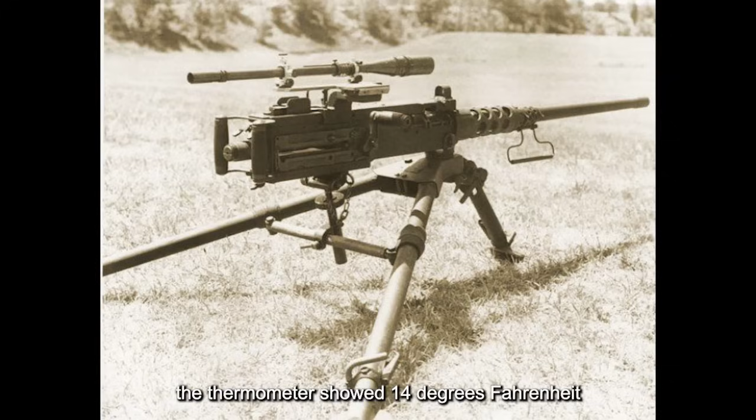January 23, 1943, Eglin Field Proving Ground, Florida. The thermometer showed 14 degrees Fahrenheit, extraordinarily frigid for the Florida Panhandle. Samuel Green observed a weapon experiencing its 17th catastrophic failure in just two hours. America's principal aircraft armament, the Browning M2 .50 caliber machine gun, lay inoperative and frozen on its testing platform. Vapor drifted upward from the barrel, a cruel reminder of how the weapon faltered in freezing temperatures.

Major Robert Johnson from the Army Air Force's Armament Laboratory slammed his clipboard down onto the icy sand, exasperated. "Green, this situation is untenable. Currently, 423 B-17s operate in England, each equipped with 13 of these weapons. That totals 5,499 guns that will cease functioning the instant they reach altitudes exceeding 20,000 feet. Our 8th Air Force achieves a 3:1 kill ratio against German aircraft when the weapons function properly. When they malfunction, our bombers become defenseless prey."

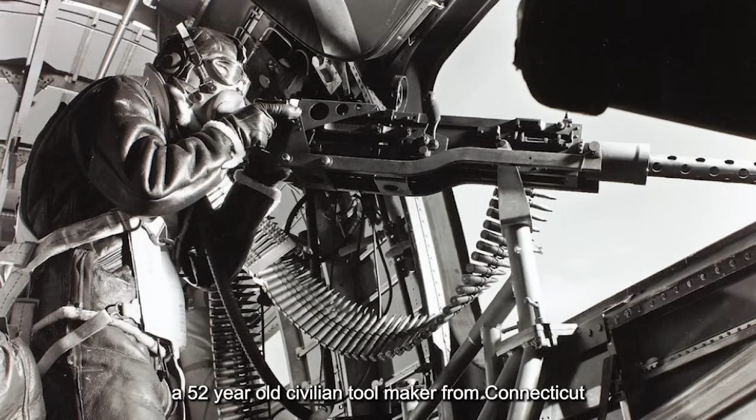Samuel Green, a 52-year-old civilian toolmaker from Connecticut without high school completion, military experience, or weapons design credentials, studied the jammed machine gun with a mixture of disappointment and intrigue. Army Ordnance specialists had pronounced the challenge insurmountable. Engineers from Browning Company had exhausted conventional approaches, yet the weapon remained frozen while American airmen perished over Germany with inoperable guns. Green retrieved a small notebook from his tool bag and documented a single observation that would transform automatic weapons engineering globally.

"The problem is not the gun. The problem is, we are trying to make the gun work like we think it should work, instead of letting the gun tell us how it wants to work."

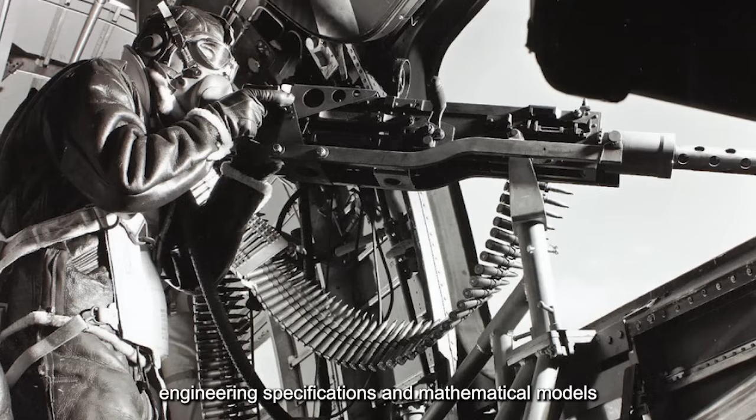Major Johnson regarded the civilian toolmaker, whose words seemed cryptic. "Green, your statement defies logic. The gun operates as an engineered mechanism governed by physical laws. We possess test data, engineering specifications, and mathematical models."

Green extracted a well-worn machinist's file from his bag. "Respectfully, Major, your mathematical models did not create this weapon. John Browning designed it through intuition. I am a toolmaker. I understand intuition. Grant me one week and authorization to alter this weapon in ways that will disturb your engineers, and I will ensure it never jams again, under any circumstances."

Neither man realized this moment would initiate the most contentious modification in United States military weapons history. Within three months, Green's unconventional solution would convert the .50 caliber Browning from an unreliable weapon into the most dependable machine gun ever manufactured. Within six months, his alterations would preserve thousands of American airmen's lives. The principles of automatic weapons design were about to be rewritten by a civilian toolmaker armed with a file and unwavering determination.

John Moses Browning's final masterpiece was the Browning M2 .50 caliber machine gun. Conceived in 1918, it had proliferated throughout American military operations. By 1942, every heavy bomber carried multiple .50s. Fighter planes employed them as principal weapons. Ground vehicles and naval vessels mounted them extensively. The United States military had adopted the .50 caliber as its standard heavy machine gun.

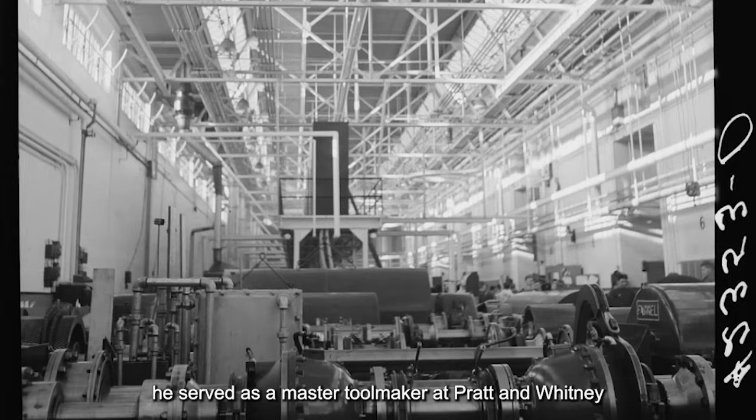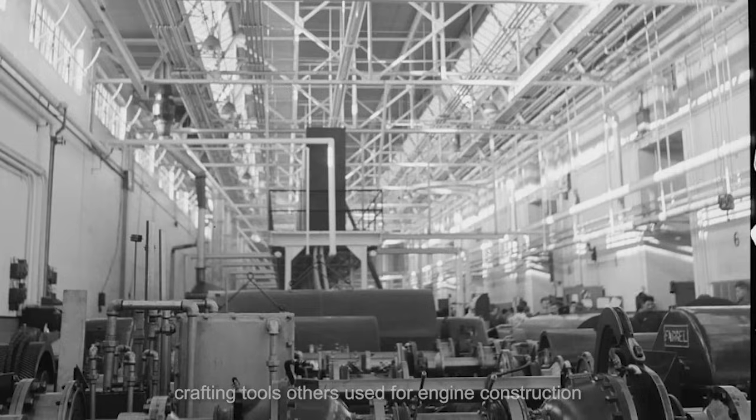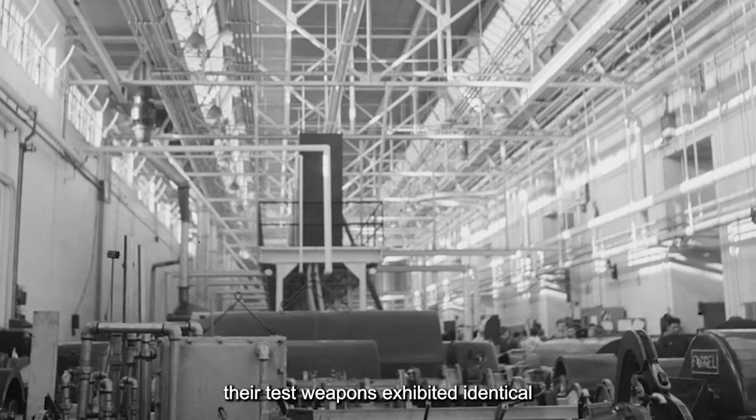Samuel Green stumbled into this crisis almost by chance. He served as a master toolmaker at Pratt & Whitney in Hartford, Connecticut, specializing in precision gauge fabrication. For 37 years, he worked six-day weeks crafting tools others used for engine construction. When Pratt & Whitney secured a contract to produce M2 machine guns, their test weapons exhibited identical cold weather jamming. The plant manager, desperate for answers, announced a $1,000 bonus for anyone solving the problem.

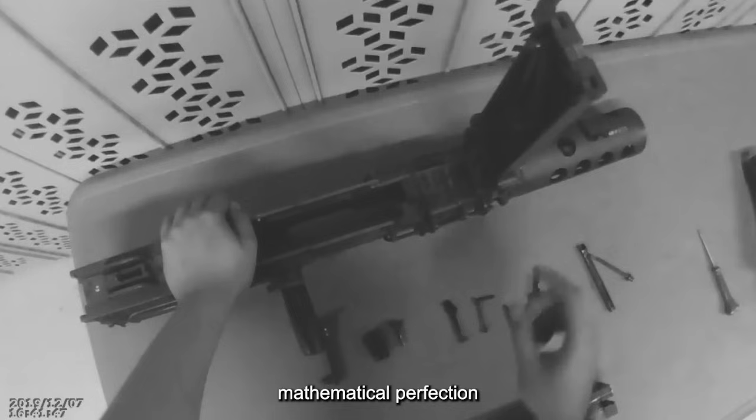He declared that every engineer examining this weapon confirmed the design was flawless. Therefore, the issue must originate externally. Browning's design could not be modified. It was already perfect. Green found this perspective disturbing. Throughout 37 years, he had discovered no design was perfect. Every mechanism possessed peculiarities revealed only through operation. Mathematical perfection and functional reliability were distinct concepts.

That evening, Green inspected a failed prototype weapon. He disassembled it entirely, measuring every component.

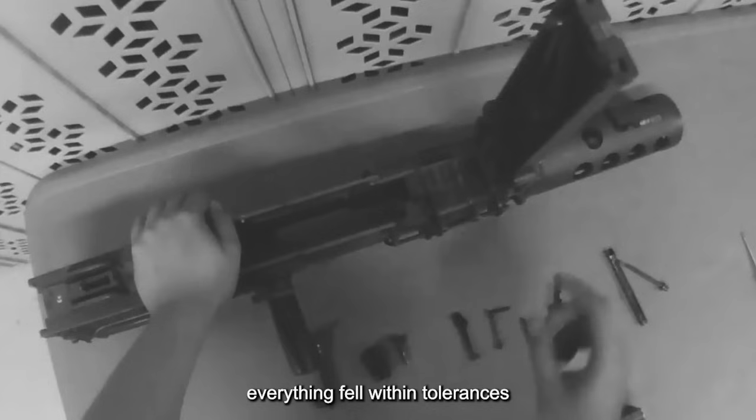Everything fell within tolerance. Everything matched specifications precisely. Yet the weapon had failed.

During slow reassembly, sensing how each part integrated, he detected something unusual. The bolt carrier fit extremely precisely within its channel. However, when Green manually pushed it, he perceived slight resistance at particular points.

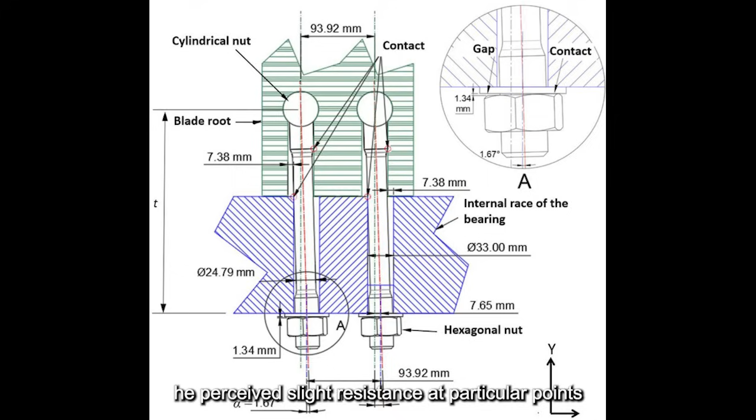He scrutinized the channel more thoroughly. The surfaces were impeccably machined, yet the channel exhibited a barely detectable bend, less than 20,000ths of an inch across 12 inches, well within acceptable tolerances. Green suspected this minuscule deviation created binding.

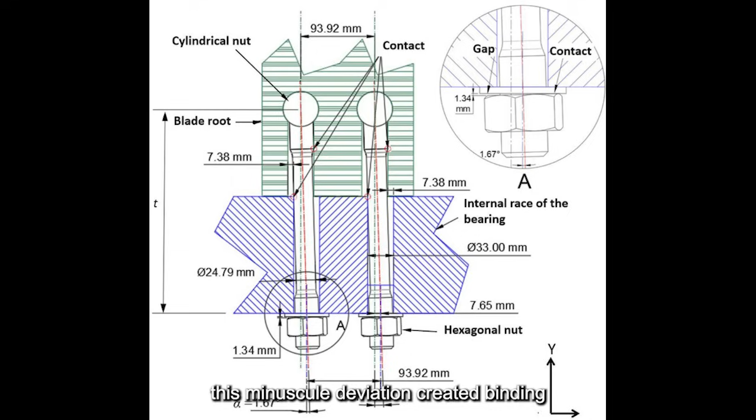In warm conditions, it proved insignificant. In cold conditions, with thickened lubricant, it was sufficient to trigger failure.

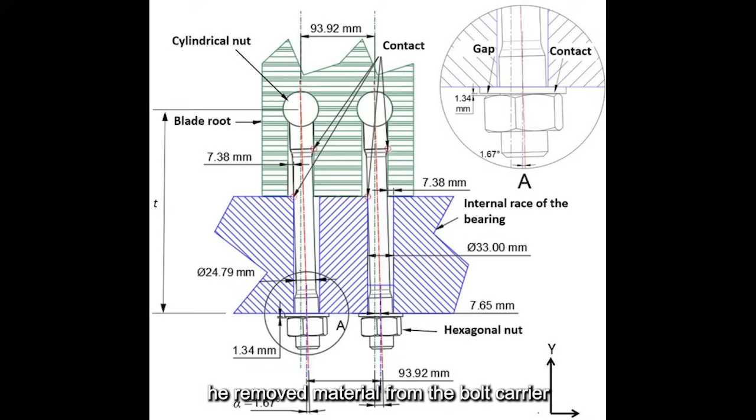That night in his basement workshop, Green initiated an experiment that would appall Army engineers. Using a precision file, he removed material from the bolt carrier, decreasing its width by 30,000ths of an inch. This expanded clearance beyond specified tolerances.

By engineering standards, he had damaged the weapon. By Green's assessment, he had provided the bolt carrier adequate room to cycle smoothly despite minor imperfections.

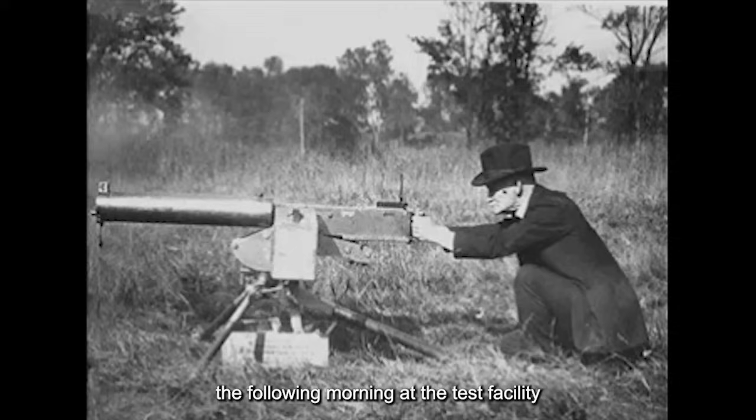The following morning at the test facility, the modified weapon underwent refrigeration at -30 Fahrenheit for 4 hours, then test firing. It operated flawlessly. 100 rounds, 200 rounds, 500 rounds, zero jams.

The range officer was astonished, then alarmed. "You altered a military weapon without authorization. You changed dimensions beyond specified tolerances."

Green replied calmly. "The specifications produce a weapon that jams. My modification produces a weapon that functions. Which matters more?" Within hours, Green confronted the plant manager and Army Ordnance Liaison Captain Robert Mitchell.

Captain Mitchell was incensed about unauthorized modifications potentially endangering service members, but the plant manager contended they should confirm whether the modification actually functions before rejecting it. Mitchell consented to forward the weapon to Eglin Field for thorough evaluation.

The weapon reached Eglin Field on January 18th. Major Johnson was dubious but desperate. On January 23rd, in 14-degree temperatures, he mounted Green's modified weapon for cold weather assessment.

The outcomes were remarkable: 2,000 rounds without a single malfunction. Subjected to -50 Fahrenheit for 12 hours in a cold chamber, it fired instantly with no jams. Intentionally contaminated with sand and dirt, it continued operating, demonstrating flawless function under conditions where standard weapons consistently failed.

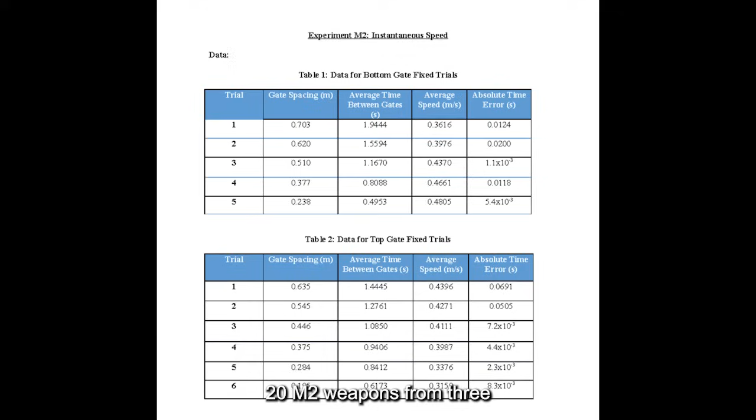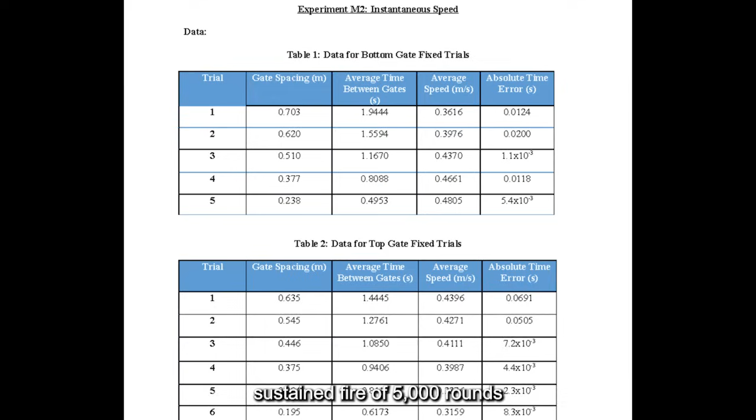Comprehensive testing commenced February 1st. 20 M2 weapons from 3 manufacturers received Green's personal modifications. Each underwent rigorous evaluation: standard firing, cold chamber testing at -50 Fahrenheit, sustained fire of 5,000 rounds, deliberate fouling, and high-altitude chamber testing simulating 30,000 feet.

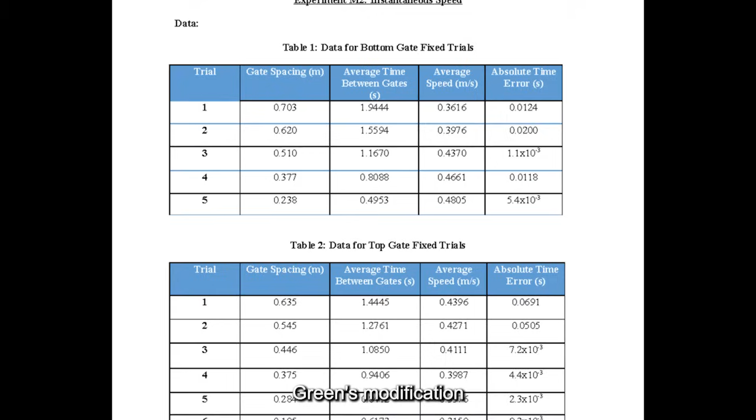Results proved consistent across all 20 weapons. Cold condition malfunction rate: 0.8%. Standard unmodified weapons: 68%. Green's modification reduced cold weather malfunctions by 99%.

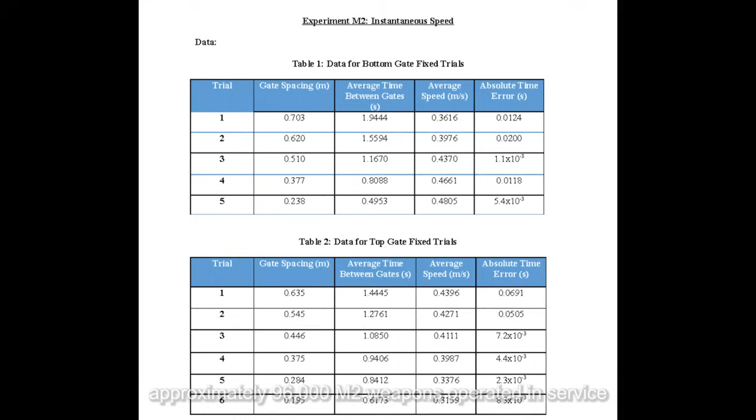Implementing this across military inventory presented enormous obstacles. By February 1943, approximately 96,000 M2 weapons operated in service, with another 60,000 in production. The Ordnance Department estimated 18 months and $12 million to modify all existing weapons.

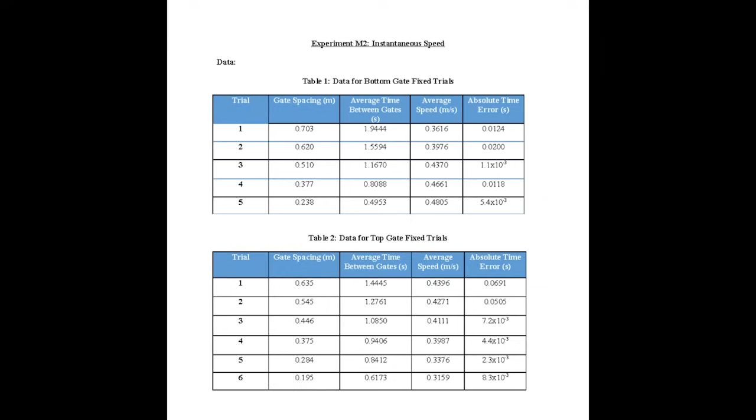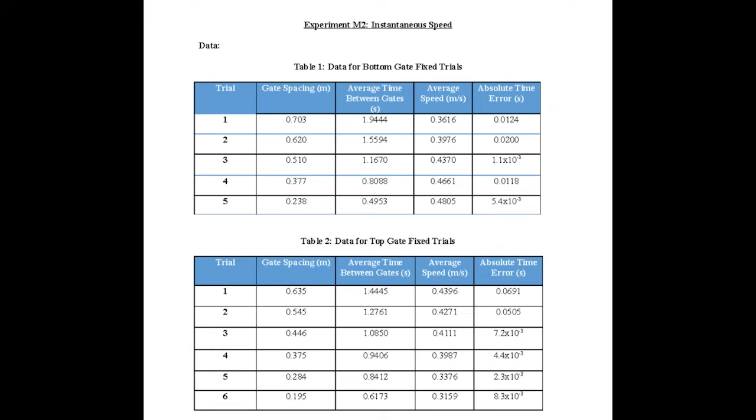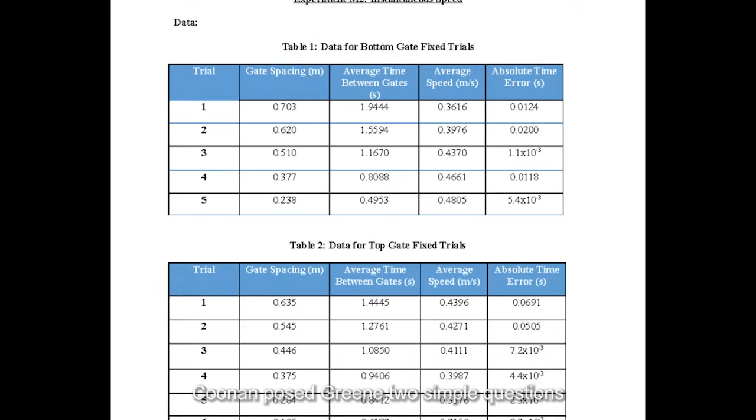Generals Lesley McNair and Henry Arnold both advocated immediate implementation, but the Ordnance Department demanded additional testing. The bureaucratic standoff resolved when Lieutenant General William Coonan, Director of War Production, personally visited Eglin Field. After observing modified weapons firing flawlessly, Coonan posed Green 2 simple questions.

"Can trained armorers perform this modification quickly on weapons already deployed? And can production lines integrate this without slowing production?" Green confirmed both.

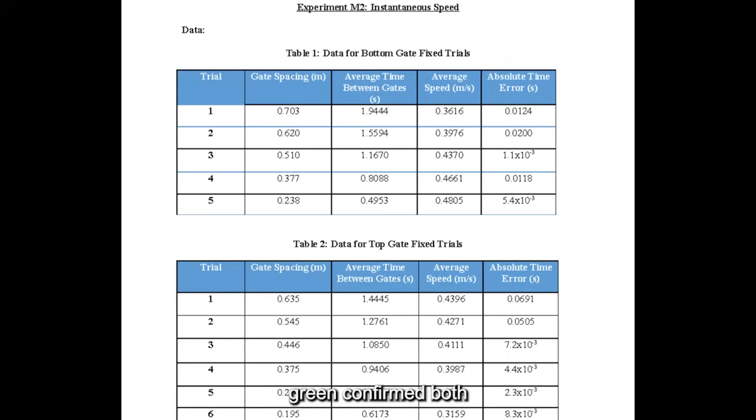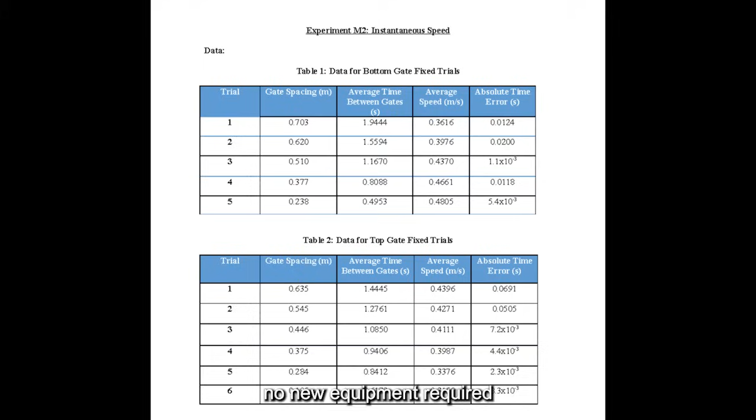Approximately 45 minutes per weapon. Production lines simply machined to different dimensions. No new equipment required. Coonan decided immediately for complete implementation across all services.

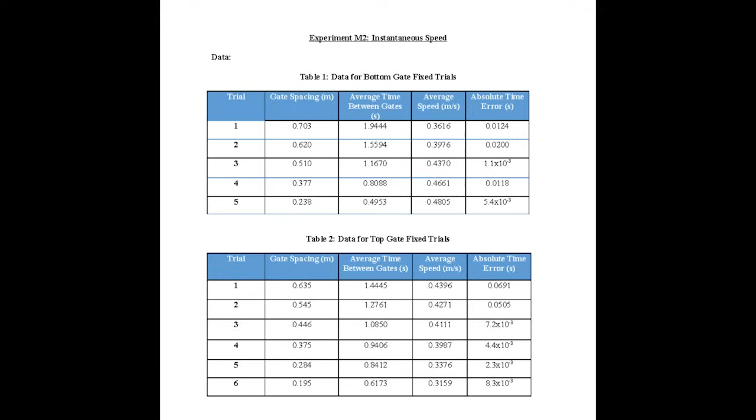All existing weapons would receive modification during routine maintenance. All production lines would implement new specifications immediately. The modification received designation Modification 743, but became known as Green's Fix.

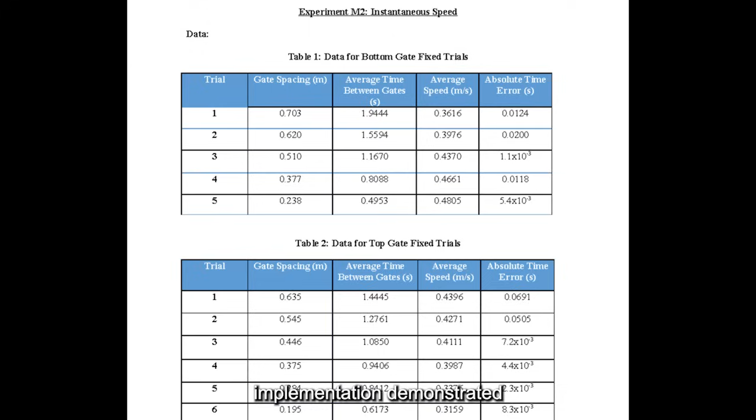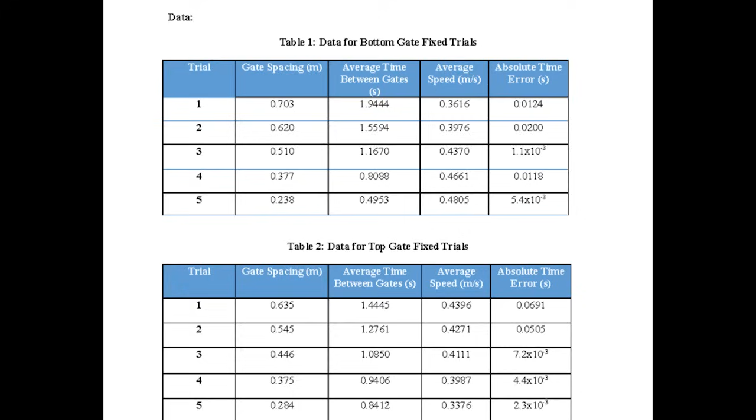Implementation demonstrated American industrial capacity at its zenith. Within 1 week, detailed instructions reached every armory. Within 2 weeks, production lines integrated new specifications. Within 1 month, mobile modification teams operated at air bases throughout the United States and England.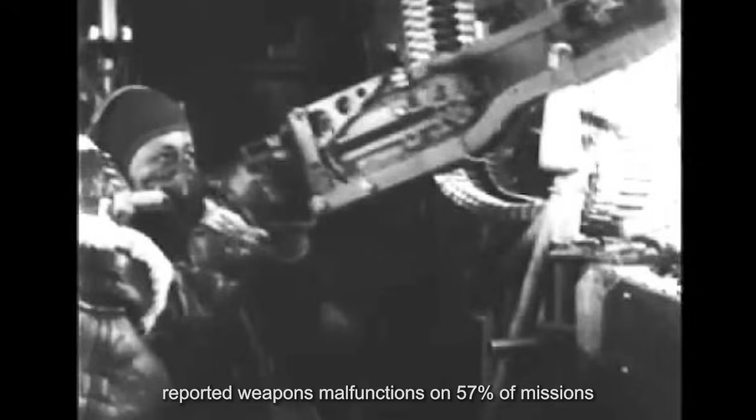Combat impact was immediate. March 1943, pre-modification, 8th Air Force bombers reported weapons malfunctions on 57% of missions. April, with 30% modified, malfunction rates dropped to 38%. By June, with nearly complete modification, malfunction rates stabilized under 4%. Green's modification reduced weapons failures by 94%.

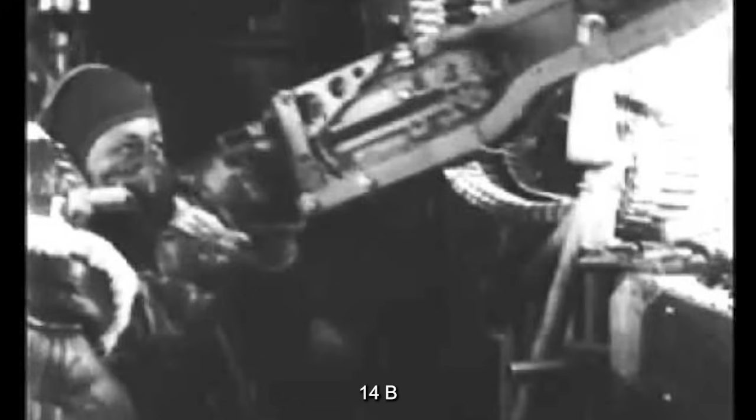More significantly, bomber losses attributable to disabled armament plummeted. First quarter, 1943, 14 B-17s confirmed lost after total weapons failure. Second quarter, post-modification, only 2 lost. The modification directly preserved bomber crews.

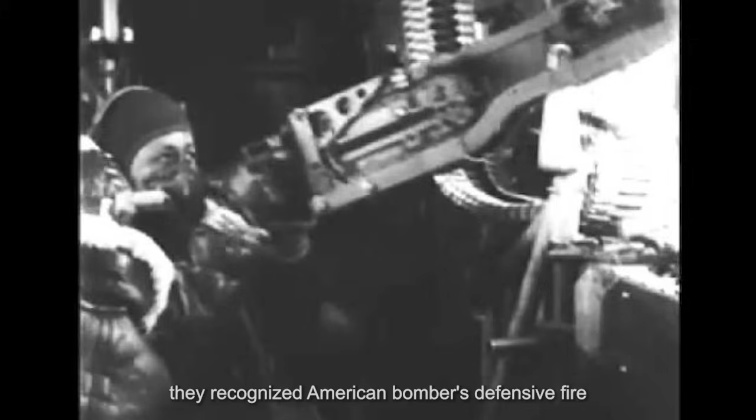German Luftwaffe pilots observed the transformation. Intelligence reports from captured pilots revealed they recognized American bombers' defensive fire had grown more dependable. One June report noted American gunners maintained consistent fire throughout engagements. The previous pattern of weapons failures had vanished. Attacking American bombers became considerably more hazardous.

Ground forces experienced comparable improvements. Tank commanders reported vehicle-mounted 50s operated reliably. Infantry heavy weapons platoons discovered their 50s demanded less maintenance. The Pacific Theater witnessed improvements in high humidity and saltwater environments. Navy vessels reported fewer jams during anti-aircraft engagements, critical against kamikaze attacks.

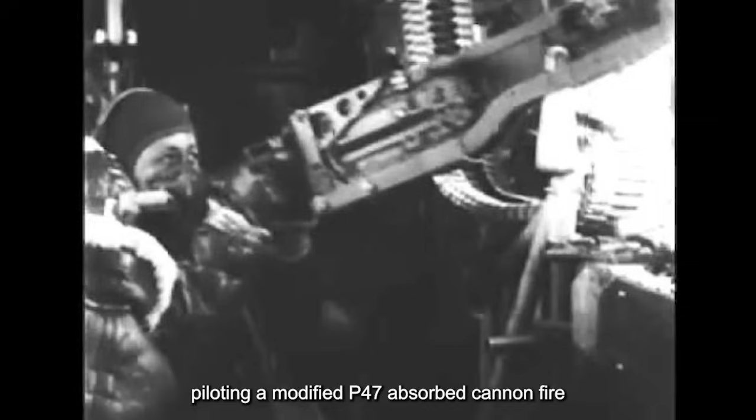One particularly striking example occurred November 2, 1943. Captain Robert Johnson of the 56th Fighter Group, piloting a modified P-47, absorbed cannon fire. His aircraft sustained 21 cannon strikes and over 100 machine gun impacts. His guns continued firing throughout.

Army engineers later determined that without Green's modification ensuring weapon reliability, Johnson probably would have perished. Instead, he survived to become one of America's leading aces with 27 victories.

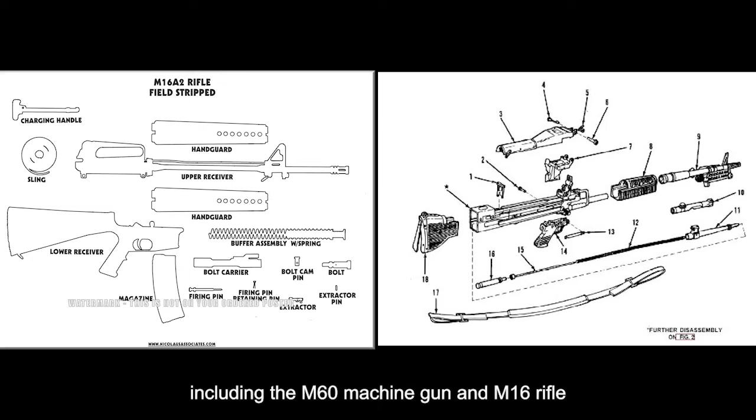The technical legacy transcended the M2. The principle of operational tolerance influenced all subsequent automatic weapons design. Post-war weapons, including the M60 machine gun and M16 rifle, incorporated clearances optimized for reliability rather than theoretical perfection. Green's insight became foundational to American weapons development.

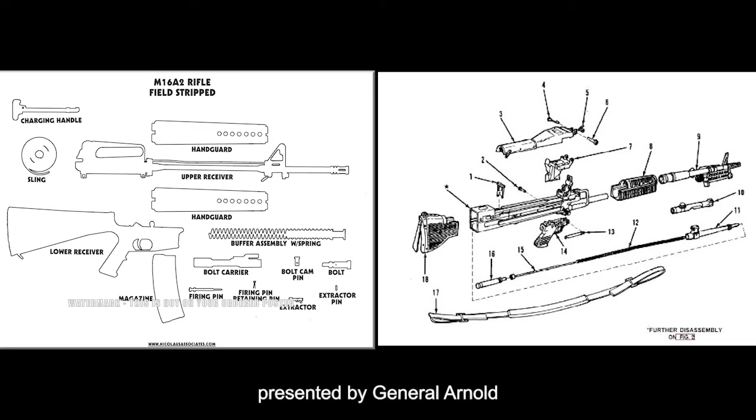Samuel Greene received the Medal for Merit in April 1943, presented by General Arnold. The citation stated, 'For extraordinary achievement in weapons development, specifically for creating a modification to the Browning M2 machine gun that dramatically enhanced reliability and saved numerous American lives in combat.'

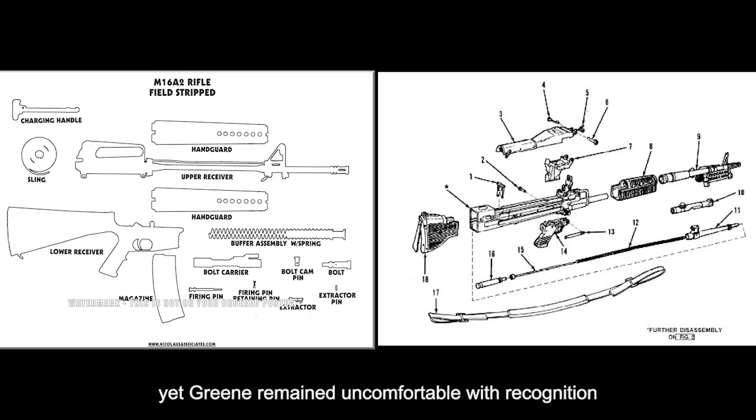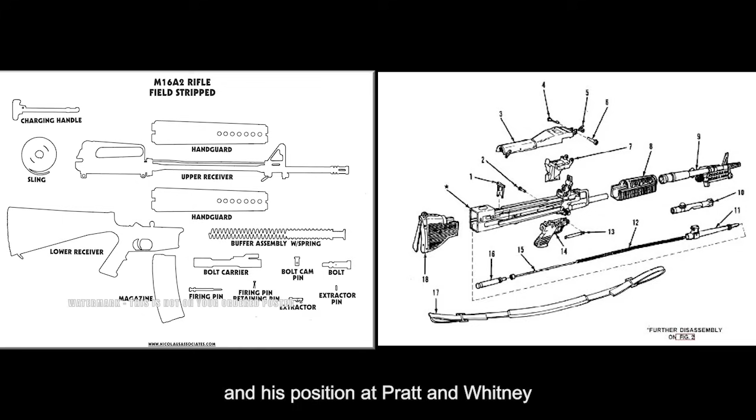Yet Greene remained uncomfortable with recognition. He attended the ceremony because Arnold personally requested it. He accepted the medal with brief gratitude, declined interviews, and returned to Hartford and his position at Pratt & Whitney. Colleagues reported Greene displayed the medal once, then stored it in his desk drawer where it remained until his 1951 retirement. Greene received hundreds of letters from servicemen whose lives were preserved by reliable weapons.

He retained every letter in a wooden box in his basement. Staff Sergeant Michael Chen, a waist gunner on a B-17, wrote in July 1943, 'Mr. Greene, our plane encountered 6 German fighters last week. All 13 guns fired perfectly. We destroyed 2 fighters and damaged 3 more. Before your modification, at least half our guns would have jammed. We would likely be dead now. Because of you, we returned home. Thank you for providing us guns we can trust.'

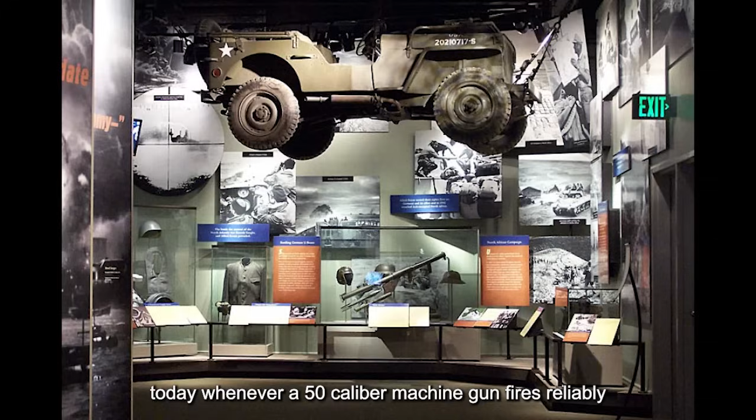Today, whenever a .50 caliber machine gun fires reliably in Arctic cold, desert heat, or jungle humidity, that reliability traces to Samuel Greene's modification. When Special Forces operators depend on their weapons in extreme conditions, they rely on principles Greene established. The civilian toolmaker who never completed high school transformed the most ubiquitous heavy machine gun in military history.

Samuel Greene passed away quietly, lived modestly, and achieved immortality by improving one gun's function. His story demonstrates that the most significant innovations often emerge from unexpected sources, that practical wisdom can surpass theoretical knowledge, and that solving problems matters more than following rules.

The mathematics were always straightforward. Standard M2 weapons experienced a 68% malfunction rate in cold conditions. Greene-modified weapons experienced a 0.8% malfunction rate. The difference: thousands of service members who returned home because their guns functioned, thousands of families who remained whole, and thousands of lives preserved by a civilian toolmaker with a file and the conviction that functioning was superior to perfection.

The weapon displayed in the Smithsonian, serial number 4327891, is a Greene-modified M2 that served with the 8th Air Force. It fired over 80,000 rounds in combat without a single jam. The placard describes its combat record but doesn't mention the Connecticut toolmaker who made that record possible.